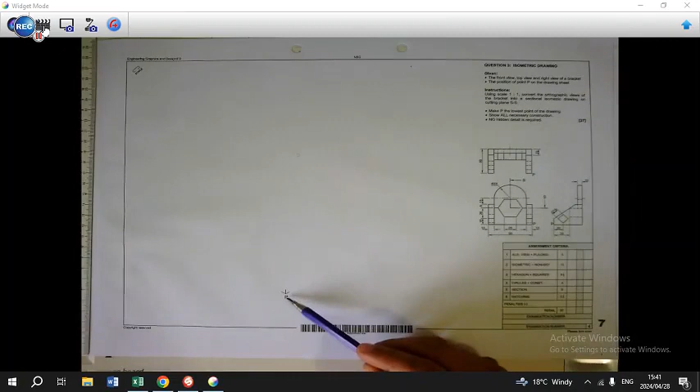Bulleted point number 1, you need to make point P the lowest point of the drawing. Point P has been indicated on the drawing sheet. Remember that the 90 will go to the left of point P, and the amount of 60 will go to the right hand side.

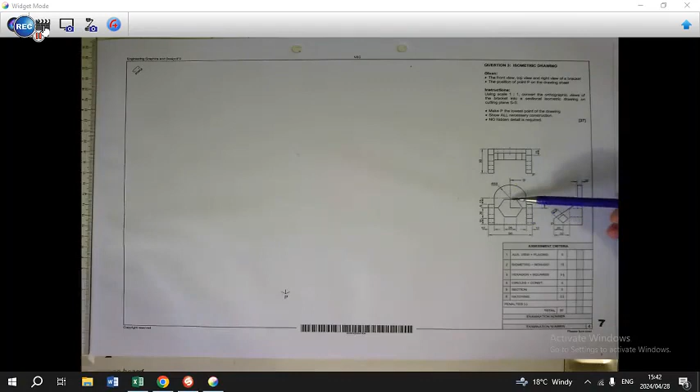Your height will of course be determined from the dimensions given here, including the radius of 33 from that point to that point over there. So you need to calculate that.

Bulleted point number 2, show all the necessary constructions of how you are going to complete the drawing, and no hidden detail is required. What you can do, however, learners, is to break this drawing into different parts.

So we're going to have two similar parts on the side here, which will look like that. I am, however, going to draw it as a full rectangular shape first before I'm going to do the cutting. So I'm going to draw this one and I'm going to draw that one. This one first because it lines up with my point P.

And then I'm going to put in a base here, which is going to be that base there, which is hidden. On top of that base, I'm going to project this part here, which I'm going to first put as a rectangular shape, and then form the curve afterwards.

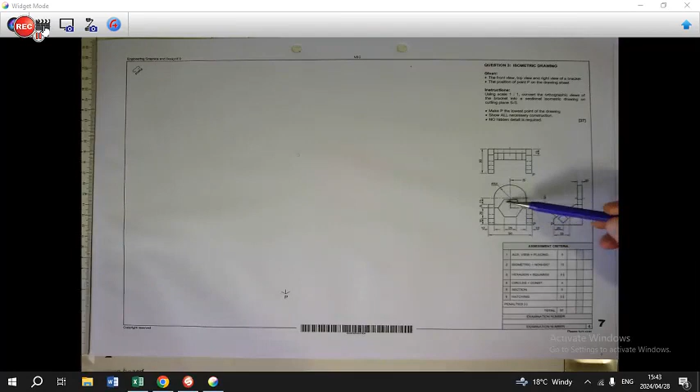And then I will have an auxiliary view to be able to put this hexagonal hole inside, centered to this part, into that back space over there.